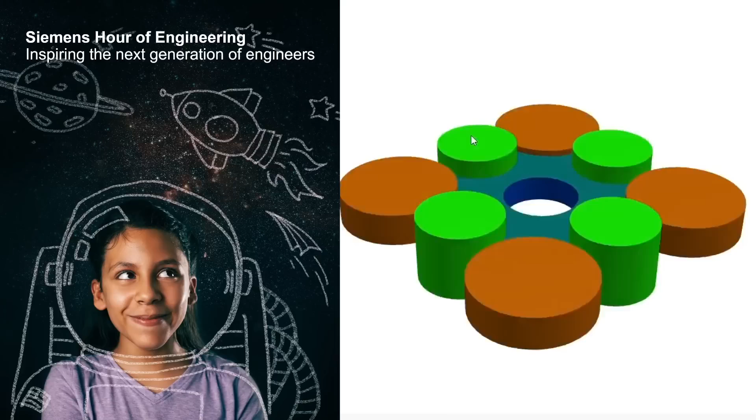We are also investing in the next generation of engineers through a new program called Hour of Engineering. This innovative program demystifies engineering and promotes it as a desirable career path by providing real-world engineering challenges connected to global goals. It helps students build engineering habits of mind like creativity, systems thinking, and collaboration. We're truly excited to engage with the engineers of tomorrow through this amazing program.

From education to startups to even larger enterprises, Siemens Digital Industries is all about helping companies like yours transform into a digital enterprise. And that digital transformation is enabled by Siemens Accelerator. Siemens Accelerator is an integrated portfolio of software and services, and it really blurs the boundaries between traditional standalone domains like electronics, mechanical, and software. It really ties all those together into one seamless whole.

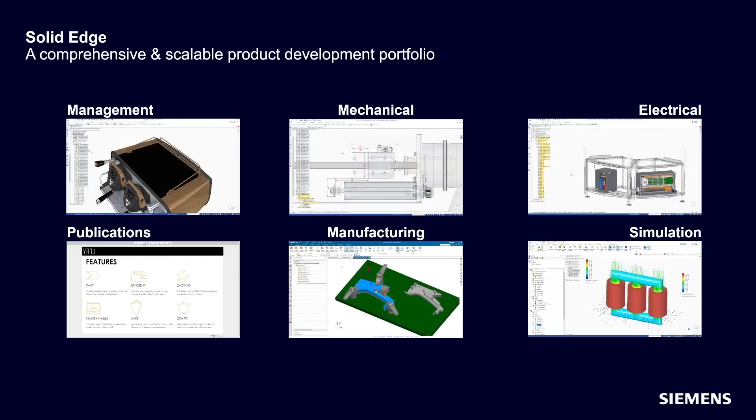And Siemens Accelerator really starts with Solid Edge. Solid Edge is a key part of the Siemens Accelerator portfolio and is focused on the requirements of small and mid-sized manufacturers. Solid Edge enables manufacturers to create a comprehensive digital twin of their products and includes solutions for mechanical design, electrical design, simulation, manufacturing, and publications. It also includes solutions for data management for all the technical data that's created and consumed when supporting the comprehensive digital twin. It facilitates collaboration both within manufacturing companies and with external resources, including suppliers and customers. Solid Edge is truly your on-ramp to digital transformation.

And we can help you accelerate that digital transformation with Solid Edge 2024. Unleash the power of intelligent product design. With this year's release of Solid Edge 2024, we continue to push the boundaries of product development. Solid Edge 2024 empowers users to design more intelligently across every aspect of product development. With a continued focus on the user experience and large assembly performance, Solid Edge 2024 introduces functionalities and enhancements to automate and speed design as well as collaboration. Here are just a few.

Nine times faster graphical performance, AI assembly relationships, great advancements in intelligent dimensioning, and so much more. Solid Edge 2024 is our best release yet.

Beta customers have already had the opportunity to experience Solid Edge 2024, and here's what one of them had to say. Each year, Solid Edge gets better and better. Everything is faster. You can definitely feel the excitement from folks like Karsten at Foca, who've had the chance to work with Solid Edge 2024.

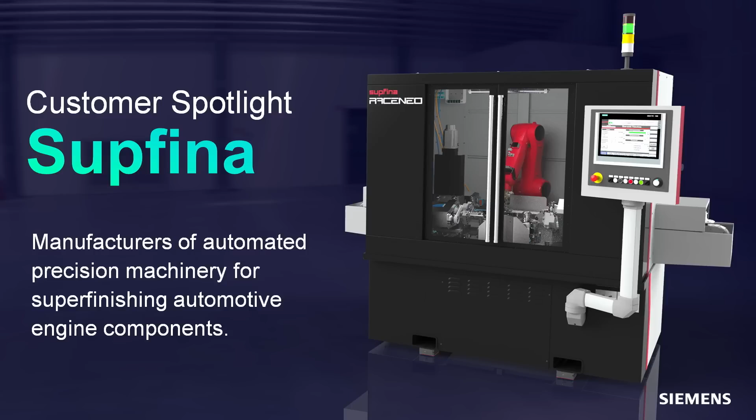Our featured customer in this year's release is Supfina from Germany. Supfina produces high-precision, fully automated grinding and honing machinery designed for super finishing automotive engine components such as crankshafts and camshafts. Let's start with a look at some overall productivity enhancements.

These are the things that will definitely make your daily life easier, and we're leveraging AI technologies in the design process to push that even further. Let's take a look with John.

Thanks, Dan. Let's dive right into this impressive Supfina machine. We'll start by focusing on the polishing tool and fixture for these high-performance motorsport roller bearings. By expanding the assembly features in the Pathfinder, we can see that a hole and cutouts were already added at the assembly level, and they need to be completed with a round and a chamfer.

New for Solid Edge 2024 is the ability to reorder the assembly features with a simple drag and drop process, just like we can in an ordered part model. It allows you to move parent and child features together, keeping your model organized.

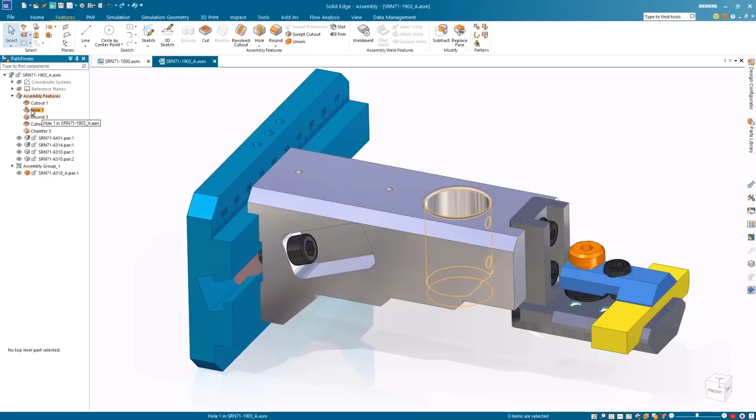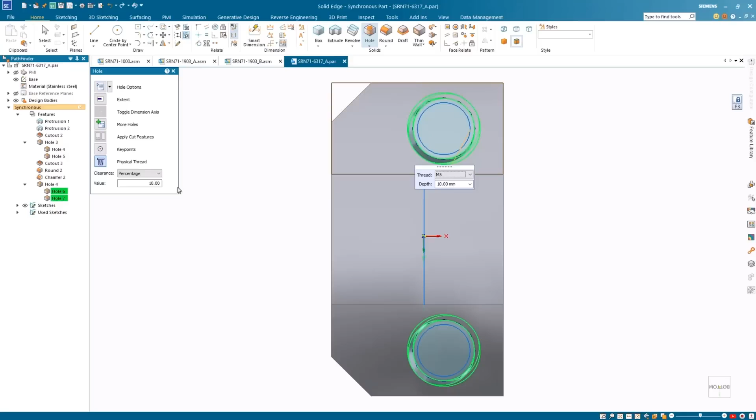The polishing tool has a 3D printed component that requires two holes to be added. To ensure appropriate fit and assembly for the 3D printed threads, we can define additional clearance values. These can be input as either a percentage or an absolute value. By selecting percentage, the internal diameter will increase by a percentage of the nominal diameter, which is seen in relation to the sketch. Switching to absolute allows the entry of a specific measurement.

To finish off the assembly, we'll add a polishing tool to the bottom of the cylinder. Here we'll add a mate and then a planar align. But then when trying to add the final axial align to correctly position it, we see it conflicts with some of the other relationships. Using the new Resolve Relationship Conflict capability, we can easily identify and suppress conflicting relations to resolve them swiftly.

This new tool helps streamline part placement and assembly relationship creation. Hovering over the listed conflicting relationships in the dialog highlights them graphically. One or more relationships can be suppressed until the requested relationship turns green, and the part is then placed correctly.

The improved Replace Part command now leverages artificial intelligence to predict solutions for replacing a single component occurrence within an assembly. The AI predictions support both planar and axial align relationships and present the solutions in a secondary dialog, allowing us to preview and select the most suitable option before executing the replacement, saving time and effort by not having to manually create relationships.

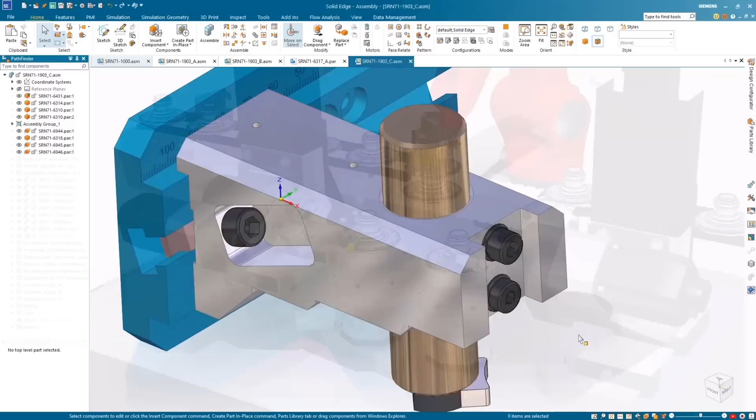Enhancements to variable table filters provide quick and easy access to filter options, resulting in an efficient experience that reduces both time and mouse clicks. In this example, variables are being used to control the position of the polishing tools and ensure they'll contact the bearing at the correct locations.

With numerous variables in the assembly, the results can be filtered by user-created, system-created, or both. Another great option for filtering is to only view variables relative to the components that are selected. This makes it easy in this case to find the swivel angle variable and make the desired change, and then change the Z axis value to change the vertical height of the polishing tool. Dan, back to you. Super.

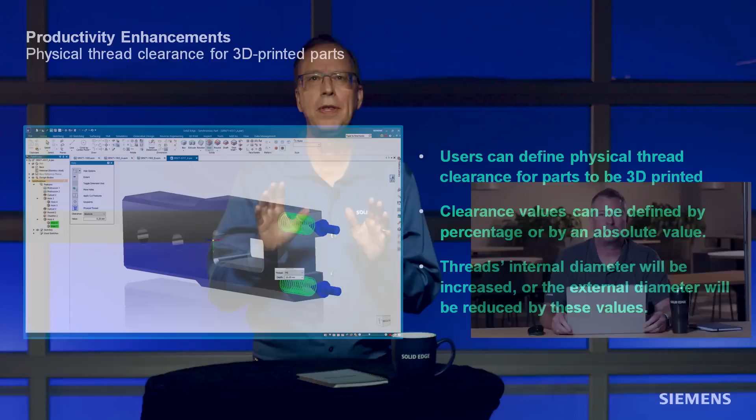Thanks, John. One of the things that you saw was physical thread clearance on 3D printed parts. And it turns out this is really important because unlike manufactured parts, where the standards define the clearance and high tolerances keep things working smoothly, in 3D printed parts you can get clashes that prevent smooth operation. Solid Edge automatically eliminates these, ensuring your printed parts work effectively.

You also saw the power of AI in action. With the improved Replace Part command, Solid Edge can now intelligently suggest assembly relationships and predict valid alternative solutions. The predicted solutions are graphically previewed in the design environment and can easily be selected in a pop-up dialog. And in addition to working with your custom designs, the AI-enhanced Replace Part functionality also works with parts from the standard parts catalog and 3DfindIT.

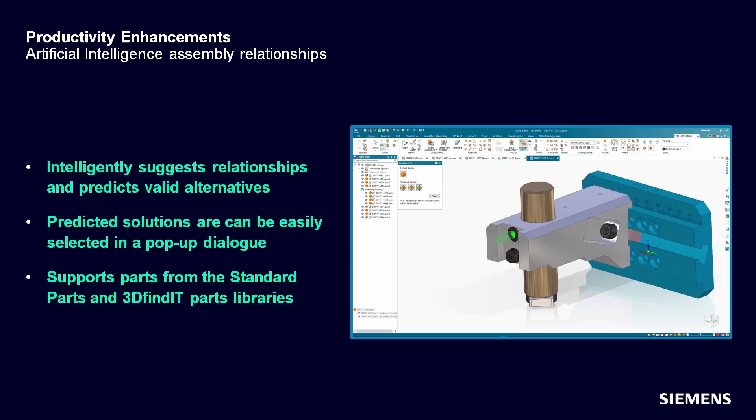Really powerful. Here's what Dave Iverson of Ariel had to say about Solid Edge 2024.

And I love the fact that he said, do more of the fun stuff. The reality is we are often doing tedious tasks. Let the computer do that. And that's what AI in Solid Edge 2024 can deliver.

Let's take a look at some more productivity enhancements in Solid Edge 2024. Over to you, John. Thanks, Dan. Let's look at even more productivity enhancements.

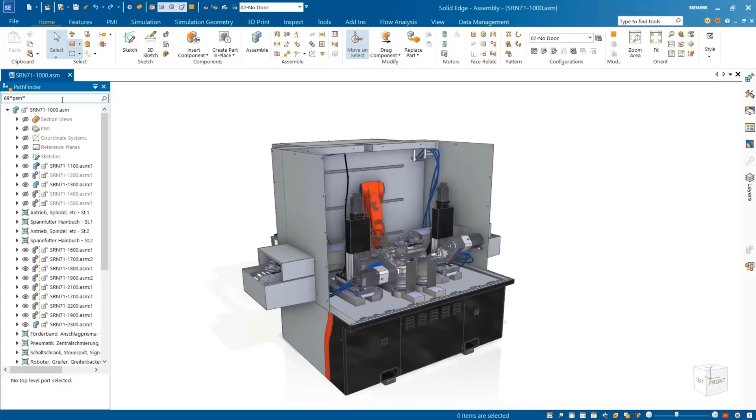Locating the right part has never been easier. Search wildcards are now supported in parts libraries, model view palettes, and the assembly pathfinder. These wildcards provide flexibility when searching and make it far easier to find what you're looking for, even if you only know part of the name. Search results display sub-assemblies and parts in various shades of green for easy identification.

With expanded family of parts options, we can now include flat patterns for sheet metal family of part members. This ensures each member contains all the information needed to create drawings and annotations. Once we define the new members, we can see further enhancements to family of parts, which include the ability to set individual material properties per member, as well as control over the suppression state of sketches and etch features. Not seen here, but we can also now handle simplified parts, coordinate systems, and reference planes too. Selecting a specific member shows the material change alongside the etch features defined for each specific member.

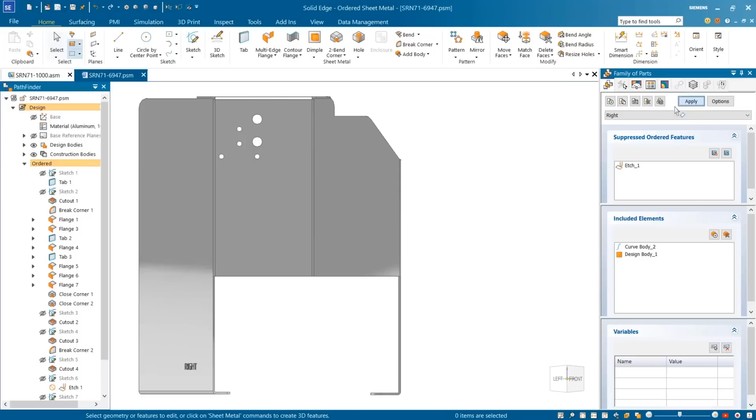Greater control of selecting objects has been added with new polygon and lasso selection options. This makes many common workflows much easier, like in this case with resizing holes. Using the lasso selection option, we'll select the desired holes and change the size with ease. These selection options are available right through the product in the part, sheet metal, assembly and draft environments.

Many designs require handed parts. These symmetrically opposite parts are identical mirrored copies of one another. A new streamlined workflow makes it easier and faster to create these left or right-handed parts that can remain associative to the original part if needed. With the selection of the mirror plane and a quick save, our new handed part is immediately available for use. And the best part of using the Save as Mirrored command is that all the features used for creating the original sheet metal part are carried over, minimizing errors when making downstream design changes.

The display of bend center lines is also now available in the flat pattern model environment. Here color coding defines the bend direction. Up bends are displayed in blue and down bends in green. The color and style of these can easily be modified to suit your company standards.

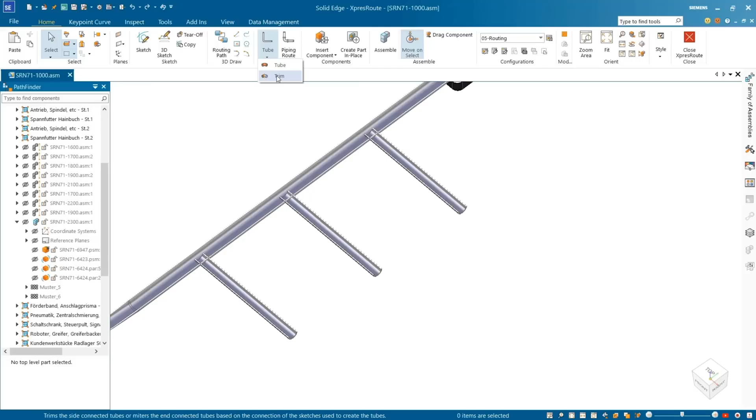In Solid Edge XpresRoute, multiple pipes and tubes can now be automatically trimmed with the help of the new Trim Tubes command. In this example, after turning on the clipping planes, we can see there's overlap between the main tube and the 3 cleaning tubes. We can trim these tubes so they join together seamlessly with just a few simple clicks. Simply select the primary and secondary tubes, then Solid Edge takes care of the rest, cutting holes and trimming the ends as needed.

Another new capability is the new Compact Recent Documents toolbar. It no longer takes up graphic space, and a single fluid click and drag quickly opens the file we need, saving time and energy.

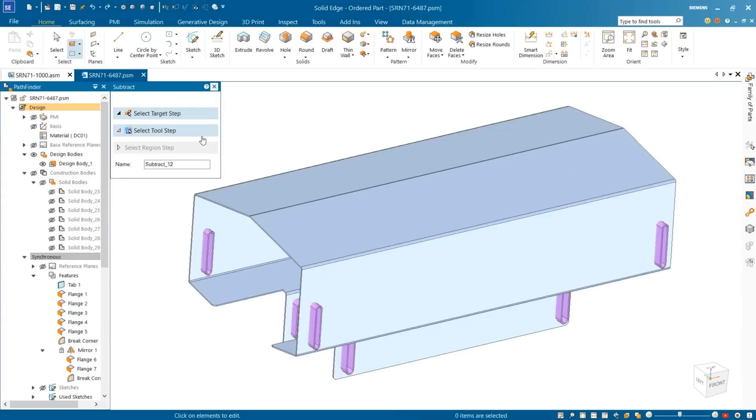The sheet metal cover requires some modification with the addition of several punched slots, which will locate it in the overall design. Construction bodies have been placed in the sheet metal part to represent the punches used to remove the material. Using the Subtract command, we can select the main target body and then quickly and easily choose the solid bodies as the tool set. Unwanted regions left behind as a result of this subtract operation, or disjoint regions, can be intelligently identified and automatically removed. Hiding the construction bodies, we can see all the internal disjoint regions within the sheet metal part have been removed, making the whole process quick and easy.

And back to you, Dan. Thanks, John. Now, obviously Solid Edge has had the ability to create left and right-handed parts for many years. But did you catch the breakthrough here? Optionally, instead of just producing a body, it will create a mirrored part with a fully editable feature tree. This frankly was quite a tough problem, and we had quite a few requests for it. So we're super happy to bring this to you in Solid Edge 2024.

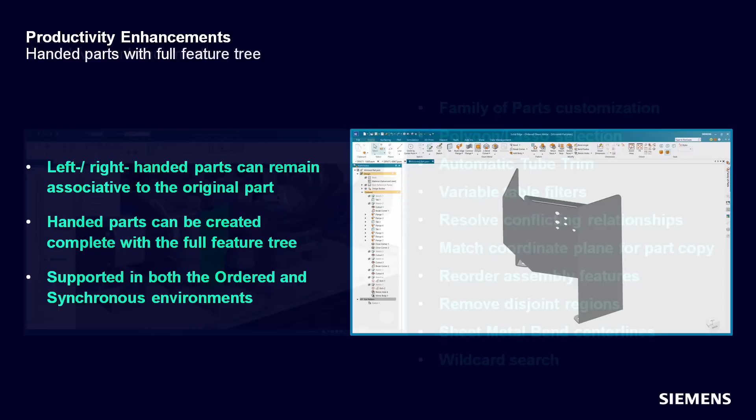You also saw a ton of other great enhancements, and just to highlight a few: now Family of Parts not only creates correctly sized bodies based on the parameters, but it also supports material, etches, coordinate systems, sketches, and more. This was a long-standing request that we're very excited to deliver.

Lasso selection can be handy in so many circumstances, and now it's super easy.

An often requested enhancement, the new Trim Tubes command automatically trims and cuts holes in intersecting tubes in the assembly environment. It not only supports tubes that butt into each other, but end-connected tubes can also be automatically mitered.

The variable table has been really improved, allowing users to access filters more quickly and easily, saving time and reducing mouse clicks.

When placing parts, conflicting relationships can now be automatically identified, giving the user the ability to resolve conflicts easily with a pop-up dialog that displays the issues. And so much more: matching coordinate systems, reordering assembly features, removing disjoint regions. The list just goes on and on.

Daniel Schultz of Kaiser had this to say: Siemens really listens to its customers. And it's true, we do. We really work closely with our customers and listen to how we can make things better, and this has really helped make Solid Edge the great product it is today.

Next up is large assembly performance. Solid Edge truly has best-in-class large assemblies, and now it's even better. Better model view performance allows you to view and manipulate even the largest assemblies without lags, stutters, or buffering.

New immersive view styles put your models in a real-world environment that automatically updates with model movement for more realism. View manipulation is automatically optimized, allowing users to run the most demanding assemblies at lightning speeds, without loss of detail or the need to adjust settings to hide features, parts, or assemblies.

Dynamic viewing is up to 3x faster on single parts and up to 9x faster for very large assemblies.

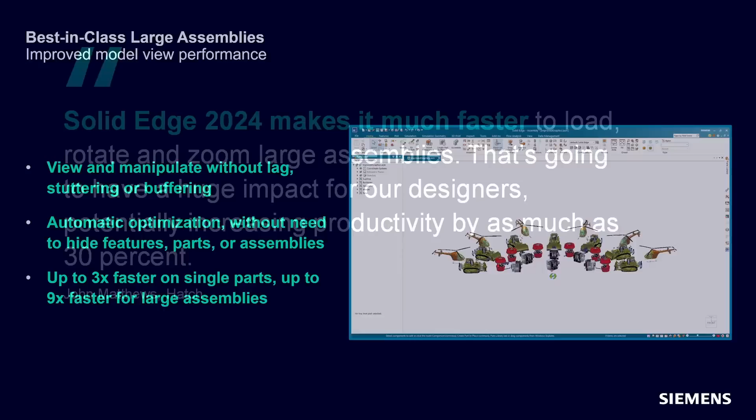Companies like Hatch are building some of the largest assemblies in the world. And as John notes, the Solid Edge 2024 advancements can have a huge impact on their designers, as much as 30% productivity impact.

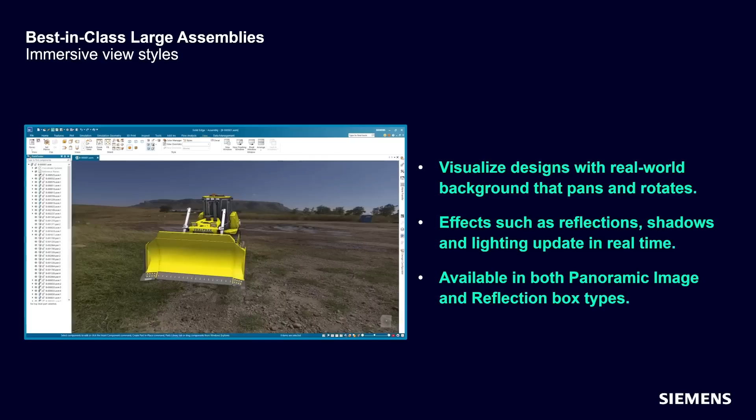In addition to the amazing speed improvements, you can also now visualize designs in a real-world background that pans and rotates with your model to create a more immersive user experience. As a design is manipulated, graphic effects like reflection, shadows, and lighting are also updated. This creates a more realistic, lifelike representation of the model in its environment. It's just like you're walking around the model in the real world.

Next up is Design Configurator, and I want you to pay special attention here because I know so many companies can benefit from this technology. Not only can you configure your own designs instantly, we are now delivering pre-configured conveyors, ladders, and other equipment that's commonly used in large machines and plants. What a time saver. Let's take a look.

Manufacturers are facing increasing pressure by their customers to offer greater choice and variety, leading to an increase in the number of product variants they need to define, author, and manage. New pre-configured models in Solid Edge Design Configurator allow quick and easy placement of intelligent datasets like ladders, conveyors, and enclosures. This helps to dramatically simplify workflows and improve productivity.

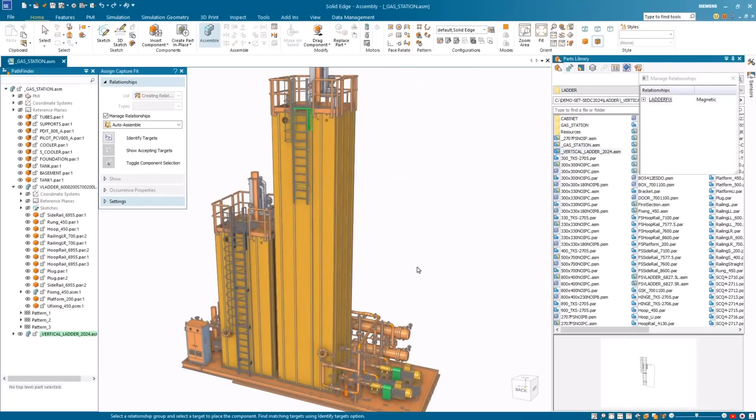In this example, a fully configured ladder assembly is being modified directly within the main assembly environment. There is no need to go back to the sub-assemblies and configure them individually. A secondary ladder is needed to complete our design. After placing the ladder, we can customize the length. Due to the intelligent model's rules, a second section and a safety hoop in the middle are also added.

To finish up the assembly, we need to add a final cabinet. The cabinet can be quickly customized inside the main assembly with the necessary dimensions and colors to fit our needs. With access to fully configured datasets such as ladders and cabinets, it has never been easier for customers to get jump-started with our Solid Edge Design Configurator.

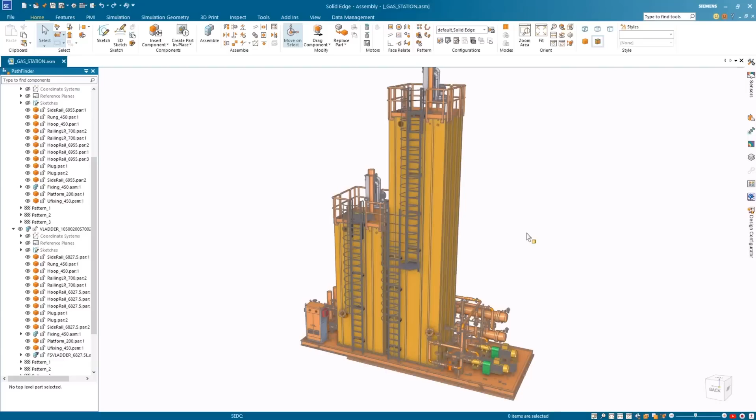With the new Call Subassembly command, alongside the Place Part Model and Loop Action commands, full subassemblies can be placed and configured right on the spot. Using these new workflow model actions, brand new assembly lines can be rapidly built. Here, base conveyors and other necessary components are being added to create the new assembly lines.

Solid Edge Design Configurator can automatically calculate the number of conveyors and other components needed to match user specifications. By inputting a given distance, the software automatically determines the number of conveyors needed. With the last machine added, the new assembly line is finalized and ready to be used.

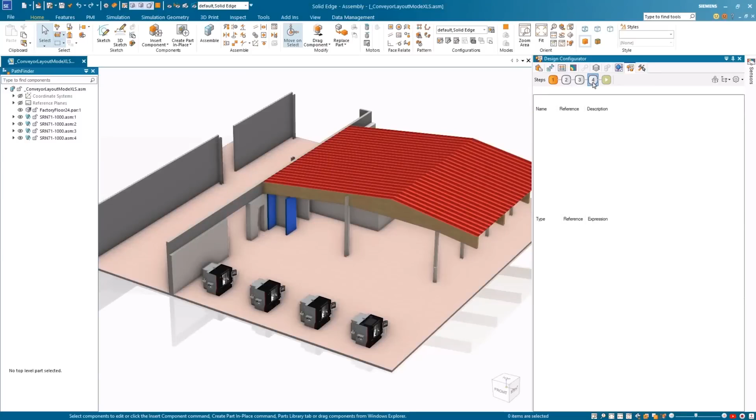The new ability to read from Excel files and external databases for input data and model actions allows you to automatically complete assembly lines in a fraction of the time. By reading the necessary conveyor placement data from an Excel file, the software instantly configures and completes the assembly line with just one click, as can be seen here.

Okay, back to you, Dan. Thanks, Sudha.

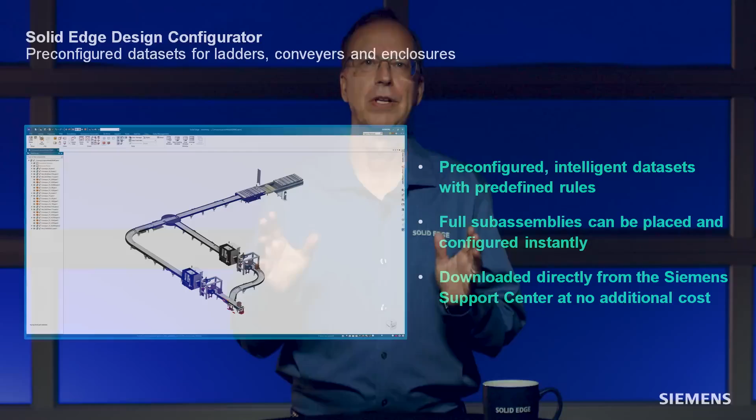Isn't that amazing how quickly those ladders were put in place and they're fully configured in seconds? You can really boost design speed using pre-configured models of ladders, conveyors, and enclosures.

One of the most requested customer features, pre-configured models downloaded from the Siemens Support Center, can now be directly used in the assembly at no cost to Solid Edge Design Configurator users.

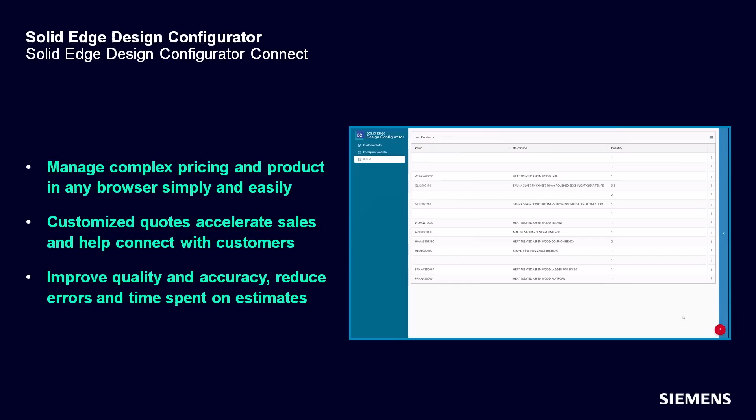In addition to all the great Solid Edge functionality you saw for configuring designs, you can also take advantage of Solid Edge Design Configurator Connect. This is a user-friendly web-based configurator that manages the most complex pricing and product configurations, allowing users to configure online in any browser simply and easily, and automatically generate sales documentation, including 3D models. Connect your engineering processes with sales and marketing, streamlining design workflows with the new Solid Edge Design Configurator Connect.

Michael Orr at Ariel quickly saw the value of Design Configurator and how it leverages your data and knowledge to really streamline assembly customization. He notes that it could be a real big time saver. If, like Michael, you thought that Design Configurator can save me time and money, I'm not surprised. It's an absolute productivity booster.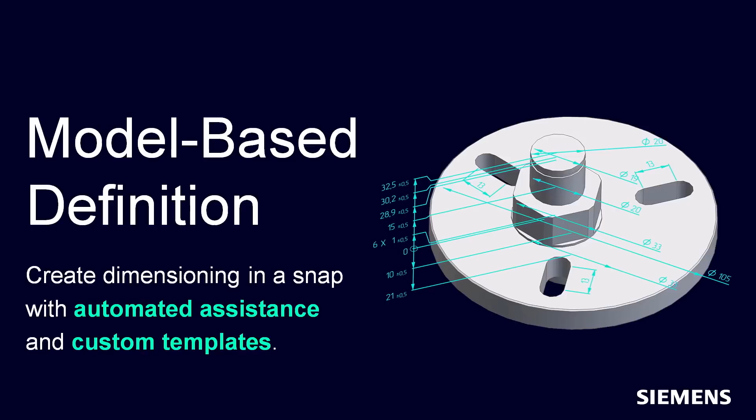Model-based definition, often called MBD, is all about moving the intelligence of the drawing upstream into the model. Why should the geometry be in the model, but critical information like tolerances is in the drawing? When we move all the intelligence to the model, we lower the 3D communication barrier and better convey design intent for downstream manufacturing processes. Here's how it works.

Sudha? Thank you, Dan. Let's look at how we can intelligently define and annotate 3D models while better conveying design intent for downstream manufacturing processes with Solid Edge Advanced PMI and model-based definition.

The improved auto dimension tool in Solid Edge Advanced PMI can now be used with 1 or 2 datums for more freedom when automatically dimensioning turned parts. Using the new recent documents preview, we will open another bracket that's been partially dimensioned.

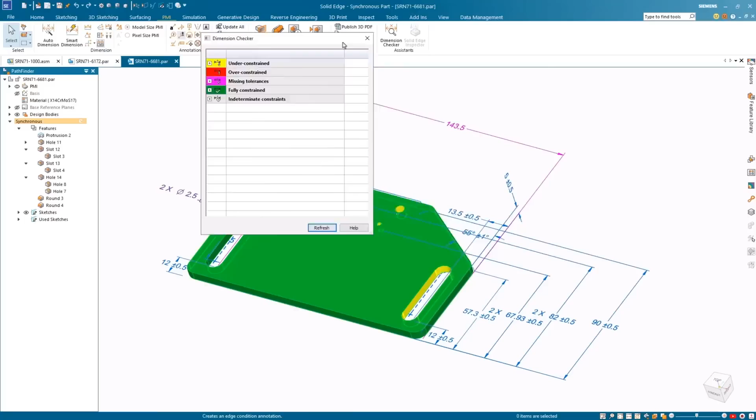With the dimension checker command, we'll quickly and easily identify the constraint status of features and parts. The model is automatically color-coded with feature IDs, informing you of the constraint status of features and if they lack tolerance information. In this example, the slot and holes are under constraint and a dimension is missing a tolerance value.

By adding the necessary tolerance, Dimension Checker will instantly update with the new status, and the Auto Dimension tool will automatically add the missing location dimensions for the holes, improving creation speed.

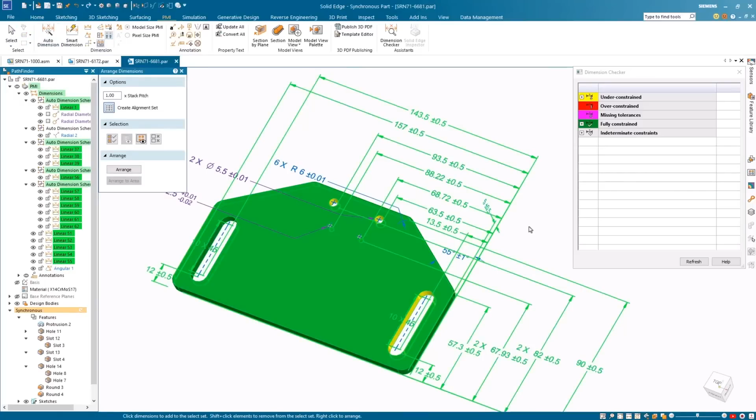The improved Auto Dimension tool also includes stack dimensions and callouts for slot and oval cutouts. Features chosen in the selected primary, secondary and tertiary planes can be auto-dimensioned instantly.

The Common Model View command allows users to create common model views automatically with existing PMI. With the required views selected, Solid Edge automates view creation.

Applying section views to a model view is easy with the enhanced vertical command bar that can be launched from the model view palette. This simplifies editing model views, as we can see here, whilst also adjusting the render mode.

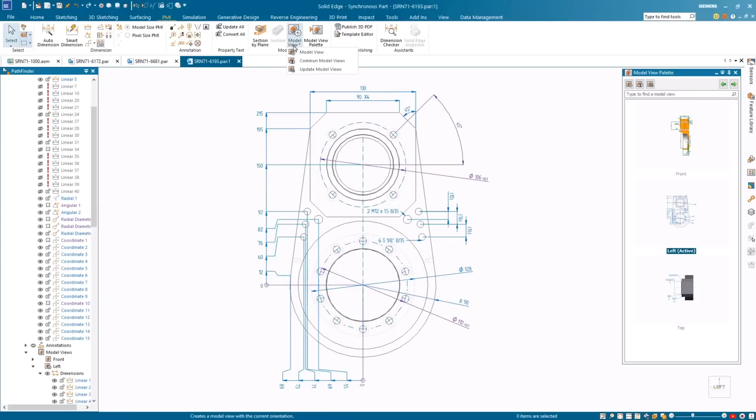To clean up the PMI dimensions, we will run the enhanced Arrange Dimensions command, which provides the ability to arrange coordinate dimensions alongside the linear dimensions. The Update Model Views automatically updates all model views when the model changes or PMI is added or removed.

Auxiliary plane indicators can be added, giving us more freedom to annotate the models based on ISO or DIN standards.

We can also convey design intent for downstream manufacturing process with 3D PDFs that can be published using templates. You can export PMI views with selected section views and render styles to 3D PDF to streamline the delivery of relevant design information. With new PMI face association, parent faces and section views are automatically highlighted when they are selected.

In the 3D PDF, assemblies can contain an interactive parts list. On selection, parts are highlighted in the list and graphics window. Associative properties such as author can also be included. STEP AP242 and JT files can also be generated and added as attachments within the 3D PDF.

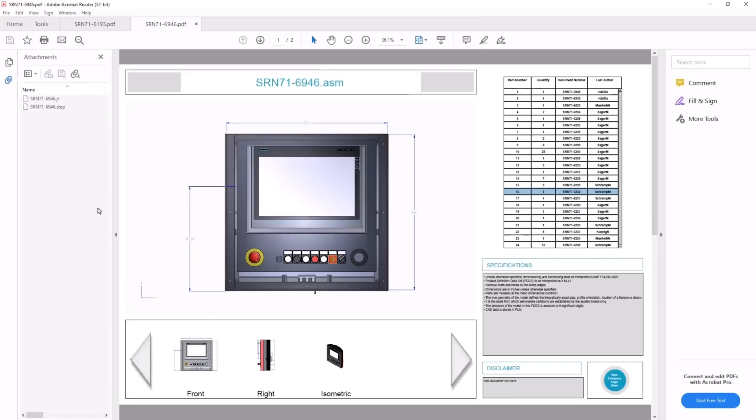Interoperability enhancements allow your Solid Edge files to look the same when opened across the Siemens Xcelerator portfolio, including NX. The improved PMI association and support for various PMI data provide increased connectivity for downstream applications. Visit the newly added Discovery Center in Solid Edge to get your free 30-day trial for Solid Edge Advanced PMI. Trials for other add-on products are also available.

Back to you, Dan. Wow, some really great stuff here, and I suggest that all companies look at this. We recognize that drawings aren't going away anytime soon, but it makes sense to move the intelligence upstream. Why have some of the information in the part and some in the drawing. Let's get to a single source of truth, the model. With 2024, there are some great enhancements here to get you on this path.

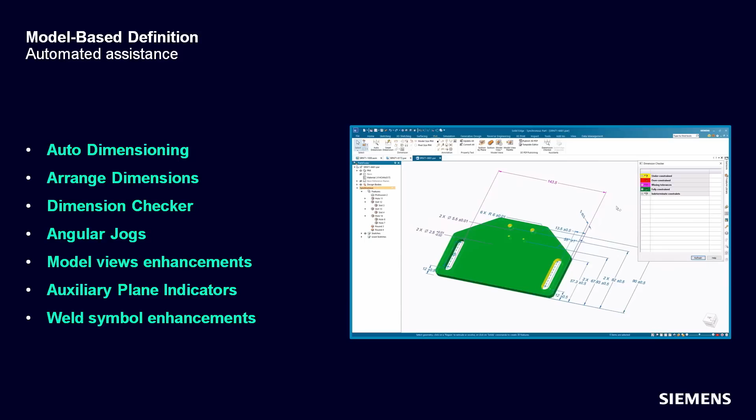Auto-dimensioning has had a serious upgrade, and the dimension checker really lets you understand if your dimension scheme is complete. And there are many other enhancements, so now's the time to get started with model-based definition. But don't worry, you can move at your own pace, either doing drawings or creating smart PDFs. It's really up to you.

I'm always amazed at how some seemingly small improvements can make such a big difference. Ken at Pello was really taken with the new, better layout that the automatic dimensioning provides, a huge help to his team. As I mentioned before, don't worry, drawings aren't going away, and Solid Edge will continue to be the best in the business.

But if you're further along in the journey and looking to publish 3D PDFs, then we have you covered. For example, 3D section views are now supported during Publish, and you can now graphically highlight items in the PDF and see what's associated. This is really helpful in downstream interpretation.

Companies like Kaiser are already on the paperless journey and are seeing definite benefits. Daniel sees some real savings coming as they transition to MBD and smart publishing techniques.

We've been talking a lot about core CAD functionality, and that is truly important. But more than ever, collaboration is key to improving engineering productivity. I don't think any of us could have anticipated how distributed our teams would become in recent years. But we definitely have some amazing tools to support this, and this comes in the form of Solid Edge SaaS, where collaboration is built right into your daily work. Let's take a look with John.

Thanks, Dan. Fully embedded in Solid Edge 2024, Teamcenter Share streamlines collaboration with all your team, partners, and customers. Users can now access Share's comprehensive suite of collaboration capabilities completely within the Solid Edge environment.

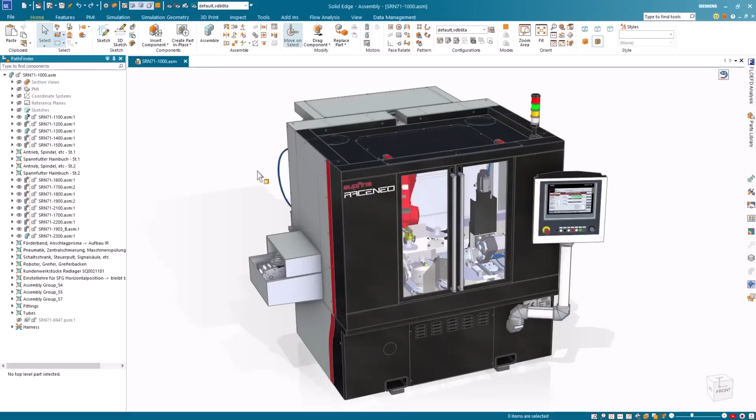Opening our Supfina super finishing machine from Teamcenter Share in Solid Edge, we get to work quickly as we look at adding threaded holes to this part we plan to 3D print. Here you'll notice the options to add additional clearance to the threads that we discussed in an earlier demo.

Using the built-in data management capabilities, we can check in files to allow other users to make modifications, or check out an assembly to ensure exclusive access while we make changes. Again, with Teamcenter Share fully embedded in Solid Edge, we never have to leave the design environment as we create a project with just a few clicks.

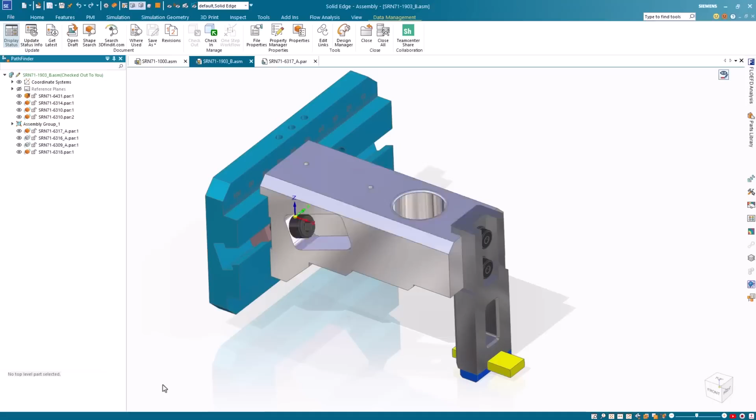With Pack and Go and the Siemens connector, we can share the subassembly directly to Teamcenter Share. Back in Teamcenter Share, within Solid Edge, we can open the project and add users to share it.

Users can be granted various access levels depending on the type of collaboration needed. We'll grant this user owner rights, giving them complete access to review, edit, delete, or reassign the project. Other access levels include review, review and download, and full access.

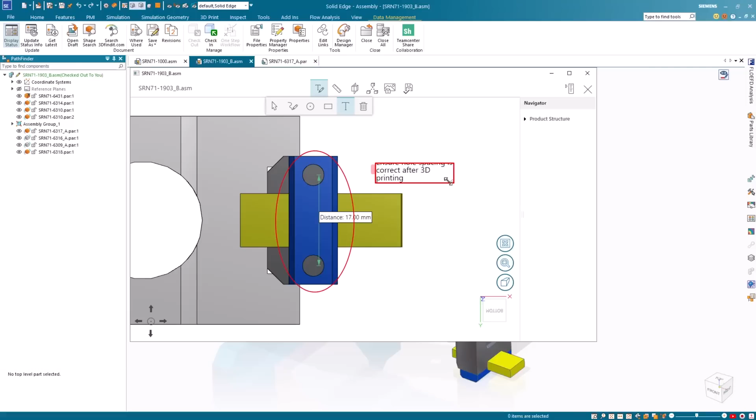Opening Viewer Markup gives us the ability to inspect the data quickly and collaborate with our team members. With the addition of threads, we want to make sure the spacing is still correct. A quick comment starts the conversation, and saving the markup makes it instantly available to our team.

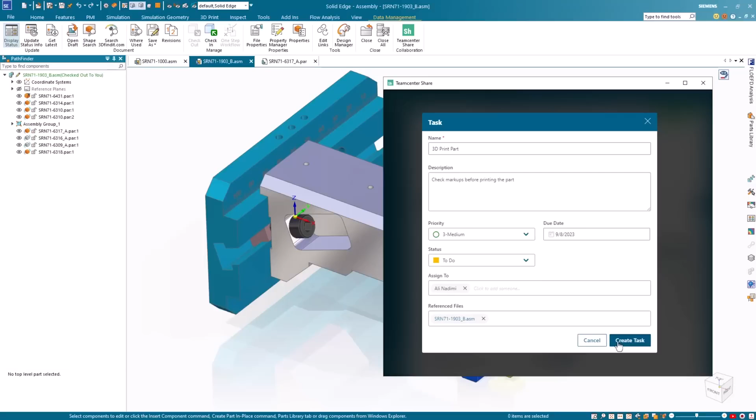Creating tasks has never been easier in Solid Edge thanks to Teamcenter Share. After naming the task, users have full control to add descriptions, set priority levels, due dates and statuses, and can assign the tasks to team members. Tasks can be viewed in a variety of ways, including on your Teamcenter Share dashboard, or as we see here, in a Kanban board. Dan, back to you.

Thanks, John. Great stuff. So you saw how you can access Teamcenter Share, a comprehensive suite of collaboration capabilities fully in the Solid Edge environment.

The same browser-based experience of Teamcenter Share is still available anytime, any place, and on any device as before. But now Share is also available without leaving Solid Edge. This saves users time by eliminating the need to switch between different application windows. Plus, you can synchronize your Solid Edge design data on your desktop and in the cloud.

Automatically installed with Solid Edge, Siemens Connector offers enhanced integration between Solid Edge and Teamcenter Share, enabling you to work seamlessly with your cloud and desktop data.

In addition to the great enhancement of having Teamcenter Share embedded in the Solid Edge environment, we continue to improve Teamcenter Share as it supports products across the Siemens Accelerator portfolio. You can now onboard multiple users faster and easier, share projects, assign tasks, and send messages to users not currently associated with the project. Attach notes to a project, files, tasks, and send messages instantly.

To support ever-growing file sizes, especially those for simulation files and results, users can now upload files of up to 500 gigabytes each. Additional cloud storage packages up to 100 terabytes are now available.

In addition to Sunny Bay, many other customers are already doing great things with Solid Edge SaaS and built-in Teamcenter Share, like Craig Hall at Hall Designs. Hall Designs is using the new cloud collaboration capability of Solid Edge SaaS to collaborate more effectively and reduce their design and development time, and dramatically streamline their communication with clients. Look at those numbers: 25% improvement in revisions and 80% time savings in sharing of designs.

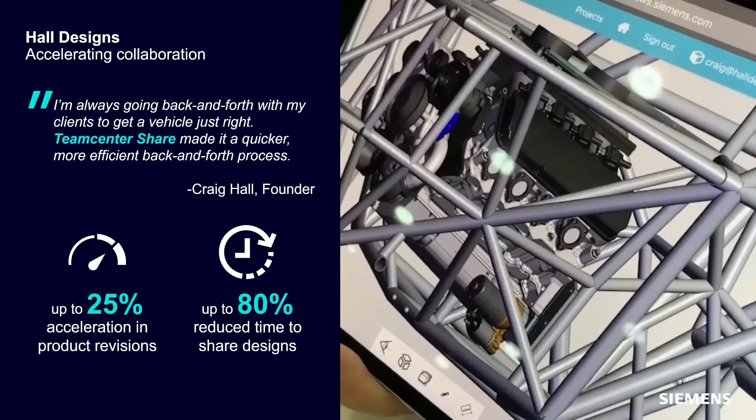Now that's productivity. Solid Edge CAM Pro has also received a great update. Get faster and more accurate programming with Solid Edge CAM Pro. Let's take a look with Sudha.

Thank you, Dan. Solid Edge CAM Pro continues to improve productivity by leveraging artificial intelligence to suggest the most frequently used machining options in a new prediction tab. No more hunting for options. The prediction tab is customized for each user.

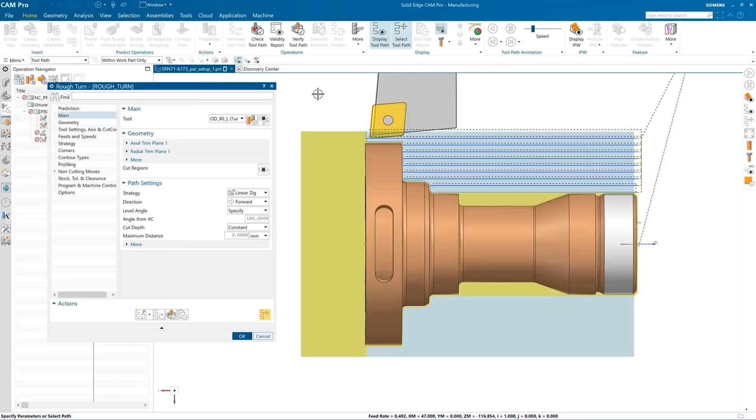Also new is auto-generate for 2-axis and 2.5-axis operations. For simple turning operations or for certain 2.5-axis milling, we no longer need to generate the operation. As soon as enough parameters are available to calculate a toolpath, Solid Edge CAM Pro takes care of it. This makes NC programming faster by allowing users to review results quicker. Similarly, any changes that require recomputation are also automatically performed.

There is also now support for prime turning. Using either Sandvik Prime Turn A or B turning inserts, we can quickly, efficiently and safely remove the material from this undercut. Notice how smooth the entrance and exits are, which produces less stress during the cutting and helps the inserts last longer.

Solid Edge CAM Pro introduces 3D adaptive roughing, which provides the most efficient rough machining possible. 3D adaptive roughing has reliable dynamic holder collision checking when the tool moves within a region or across multiple regions. Tool path generation is faster and bottom-up cutting has been enhanced. We also added a new option to top off flat faces for faster throughput.

Moving forward with our success with PostHub, we are now introducing the Cloud Connect tool library. As the name implies, cutting tools are now stored in a cloud database for easy access. Tools and holding devices can be easily searched, downloaded and modified.

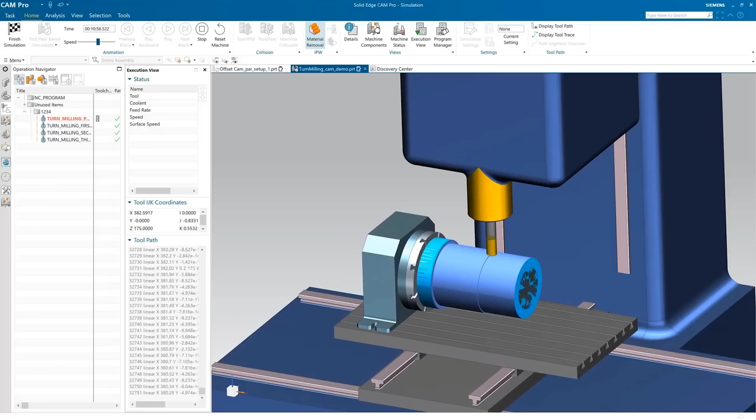Turn milling is a new operation subtype designed to easily machine symmetric and eccentric cylindrical surfaces with high surface quality, precision and high cutting volume. It is used to pre-cut cylindrical parts before finished machining with the other rotary milling operation subtypes.

Solid Edge CAM Pro provides cutting-edge updates that accelerate machining while bringing the power of artificial intelligence and the cloud to speed your manufacturing processes. Back to you, Dan. Thanks.

Some real time savers in there. The 3D adaptive roughing means faster programming and more efficient machining, while the AI-assisted operation editing predicts the most probable parameters, accelerating programming processes and ensuring accurate repeatability. The new prediction mode will learn from the user's best programming practices to dynamically change and predict user behavior.

Cloud Connect tool library is a new application that utilizes the cloud and provides a user-friendly, intuitive experience when previewing tools and dimensions. And PrimeTurning is now supported.

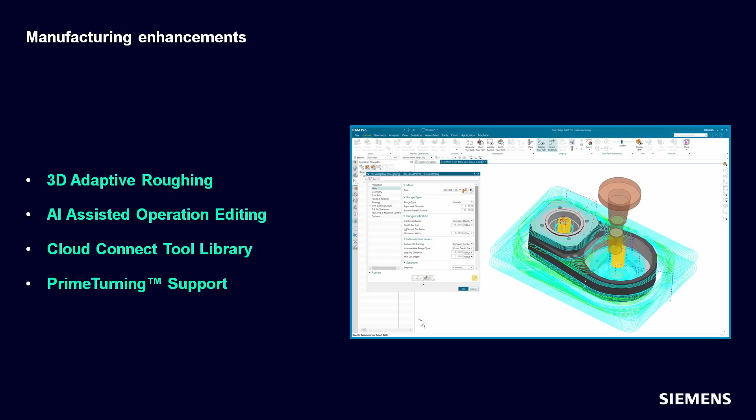PrimeTurning is a new methodology which enables turning in all directions, resulting in a 50% productivity increase for turning operations. Enhancements in Solid Edge simulation and Simcenter FLOEFD for Solid Edge increase simulation performance and speed with improvements to meshing, structural analysis, and interoperability.

Here's Sudha. Okay, thank you, Dan. New for Solid Edge 2024 is the ability to import solid temperature results from Simcenter FLOEFD for Solid Edge into a static simulation study.

Here we see the results of a FLOEFD simulation in a heat exchanger and the temperature distribution of the fluid flow on the parts.

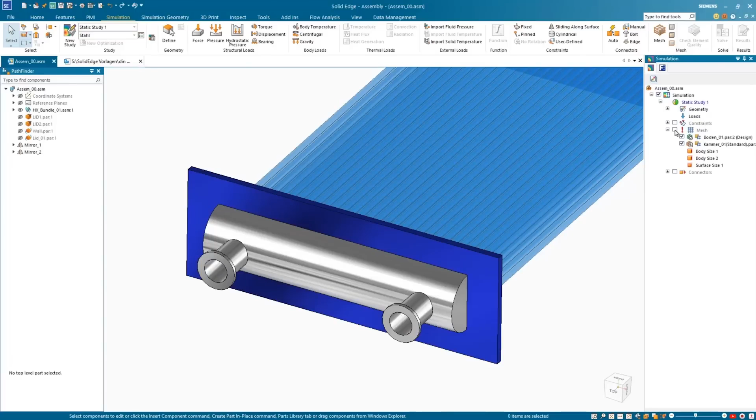Switching to Solid Edge simulation, we already have a study created with all constraints but without any loads. Using the new import solid temperature function, we can set the load for our simulation study and start the solve. The Solid Edge simulation study processes the results from FLOEFD and solves the calculation.

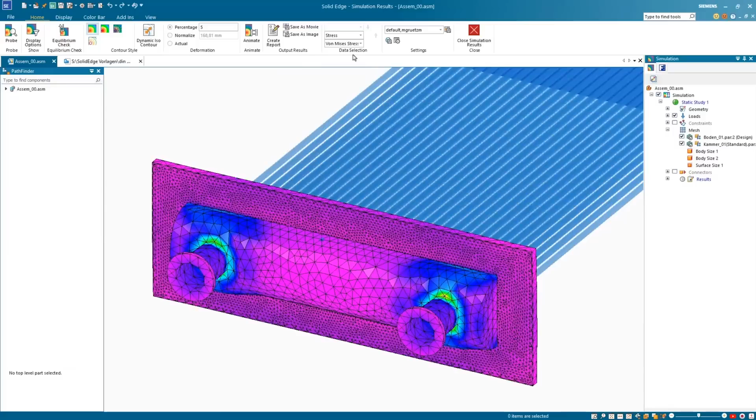Viewing the results, we can see there are high stresses in the parts as a result of the temperature. This interoperability is useful for finding the thermal stresses and deformation in solids, helping understand part behavior and avoiding failures long before real products are manufactured.

Solid Edge 2024 also introduces the ability to apply a force to any user-defined point, allowing for greater control of simulation studies. In this example, we have already created a study to show what happens when the component is put under an internal pressure. With some further analysis, we can define some additional loads.

An easy way to do this is simply to add a force to a point. We have already defined a sketch, but we will add an additional sketch point that we wish to use in our study. Then select this point to apply the force to. We will set the force direction, solve the study, and then review the results.

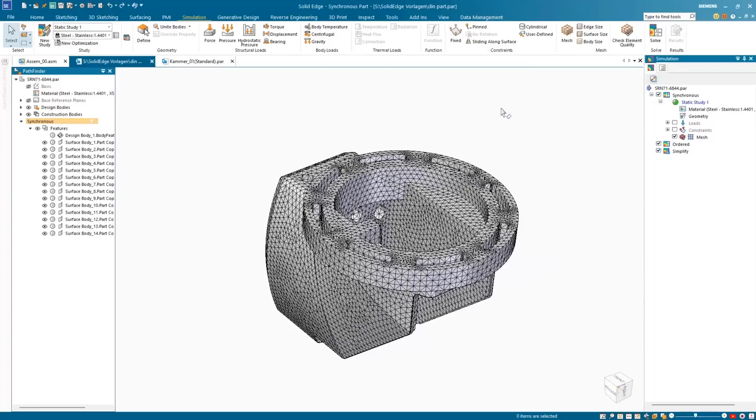Finally, we want to look at another function that is very useful for checking more complex models. Our model already has a mesh generated and we wish to analyze the quality of it with the check element quality function. It hasn't always been easy to identify the problematic areas, but now the display of mesh quality checks has been improved to make it easier to identify poor quality areas. This means users can now immediately take the necessary actions to address any problem.

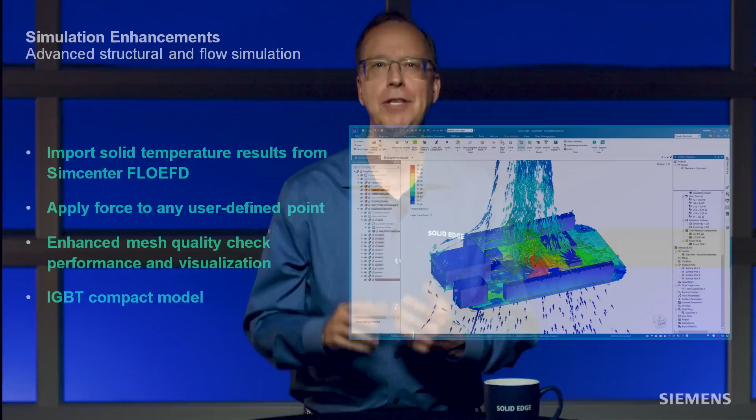Looks great. As you saw, Solid Edge simulation users can now import solid temperature results from a Simcenter FLOEFD analysis into a Solid Edge study. The new option to apply force to any user-defined point, rather than just a mesh vertex, allows for greater control of simulation studies. And the display of mesh quality checks has been improved to make it easier to identify poor quality areas. Finally, the insulated gate bipolar transistor, or IGBT compact model, is now composed of an electrical element and two resistor component compact models, providing a very efficient representation of the IGBT element.

Next, I want to talk about value-based licensing, which is a truly important innovation, allowing you to explore and use a variety of Solid Edge portfolio products at a very low cost.

Rather than traditional purchasing of individual products, value-based licensing provides cost-effective bundles of license tokens that can be used to access Solid Edge add-on products on demand. You get instant access to advanced functionality that can be shared across your product development teams on an as-needed basis, and at a much lower cost than buying individual products. Let's take a look at how it works.

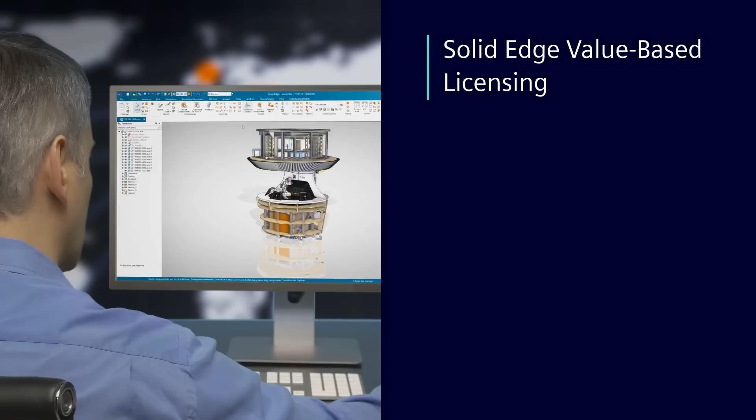New for Solid Edge, value-based licensing. A flexible licensing option to help you with the challenges of a rapidly changing development environment. This approach allows you to discover new Solid Edge add-on products while increasing flexibility for you and your team. Let's have a look at how value-based licensing works, starting with the base application, Solid Edge Classic or Premium.

Value-based licenses offer a fully flexible environment in which users can explore different functionalities. Companies acquire a set of tokens, which allow the running of a wide array of applications. Tokens are available in yearly subscription packs that make the add-on products available as a single shareable bundle. Tokens can be checked in and out to allow for maximum flexibility.

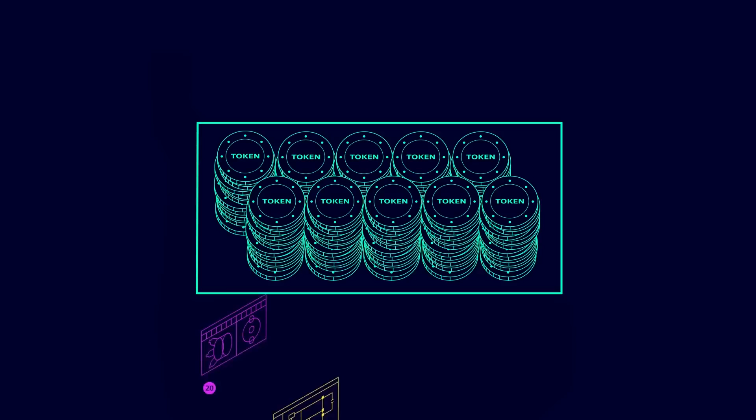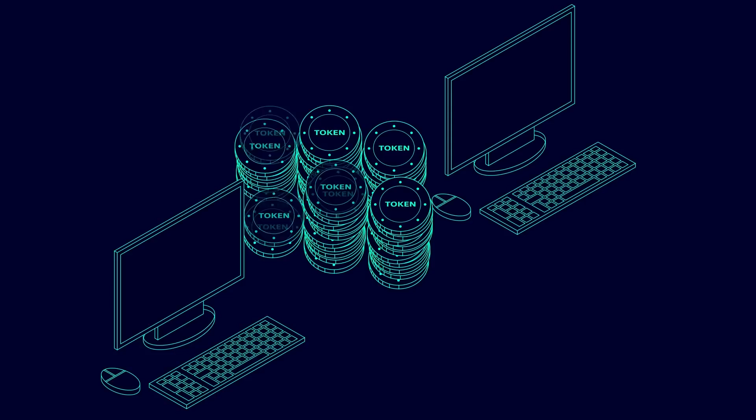Just imagine, a worker is confronted with a maximum token limit. By having a joint token pool, the limitation is automatically lifted as he or she is able to claim unused tokens from a colleague. In this context, it's also perfectly possible for users to use the same application simultaneously, as long as the token maximum isn't reached.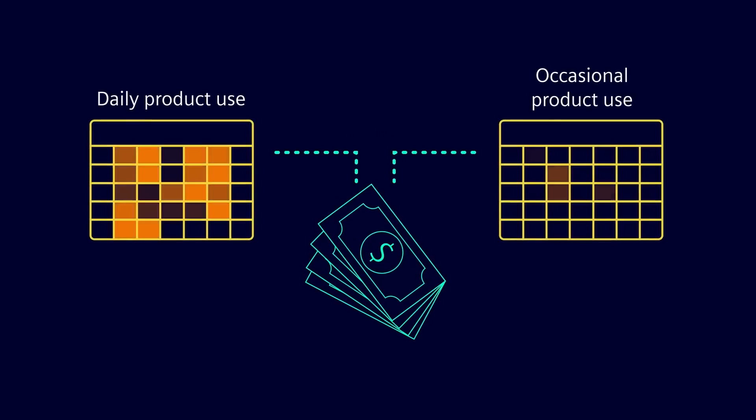Value-based licensing gives you the ability to manage costs, discover new applications, and easily scale your business. In many cases, the total investment is less than individual licenses, yet the flexibility dramatically increases regardless of whether the modules are used daily or occasionally.

Value-based licensing, new for Solid Edge, offers a truly flexible, cost-effective, simple-to-scale approach that reduces risk over time and encourages users to maximally explore new possibilities.

I think you're really going to like value-based licensing. Look at the list of products here. These are all valuable products, but are you going to use each one every day? What if you could just mix and match and decide what you want to use at any time without having to buy all the individual products?

Well, now you can. Generative Design Pro, Point Cloud Visualization, Solid Edge Simulation Advanced, and all the others you see here are all available through value-based licensing. I think you can see how this can add a whole new dimension of flexibility and access to your product usage.

Tokens are available in yearly subscription packs of 25 and 50 that make the add-on products available as a single shareable bundle. Tokens can be checked in and out to allow for maximum flexibility. Users can mix and match the add-on products as needed within their permitted token allowance. It's really the ultimate in flexibility and will give you access to technologies you never thought possible at an unbeatable price point.

In addition to all the wonderful enhancements you've seen in Solid Edge itself, the Siemens Xcelerator portfolio is the most powerful in industry. And with Solid Edge, you can connect to the many other powerful applications that are part of Siemens Xcelerator, like NX and Teamcenter. Let's take a look at how Solid Edge and Teamcenter work together closely in a product configuration scenario. John? Thanks, Dan.

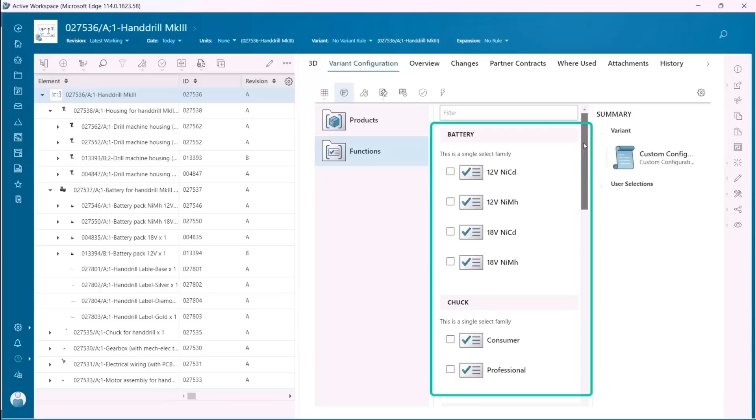Engineering complexity explodes as products become more complex. Product cycle times become shorter, markets and manufacturing go global, and customers demand more choices and customization. Companies need a solution that enables them to manage this complexity, from product inception through to manufacturing, in a simple way that enables reuse and commonality, and eliminates engineering cycles on products that will never be offered on the market. Teamcenter and Solid Edge are industry-leading solutions that address these challenges with tight integration.

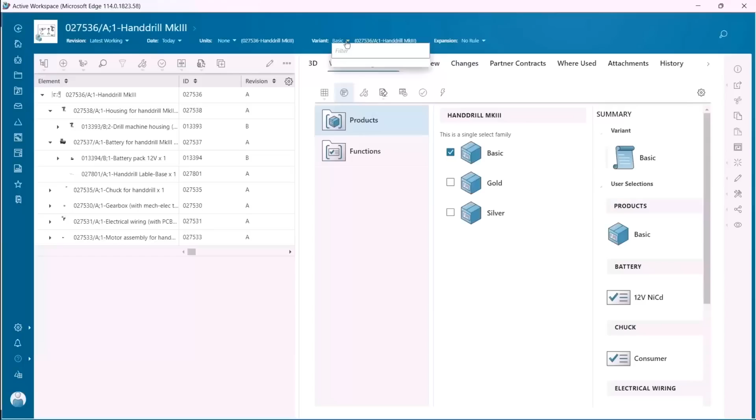This handdrill assembly has been configured with product family members using Teamcenter Product Configurator. We're seeing the full 150% bill of material, and if needed, we can apply a variant which updates the bill of material accordingly. In this case, the handdrill has been configured with 3 variants.

Once opened in Solid Edge, we get the options to load a 150% unconfigured bill of material, or we can select a product variant which loads a 100% bill of material. We'll select the standard basic variant from the product family and load it in Solid Edge. All the components associated with this variant are loaded. We can verify this by expanding the subassemblies to visualize the components associated to this standard variant.

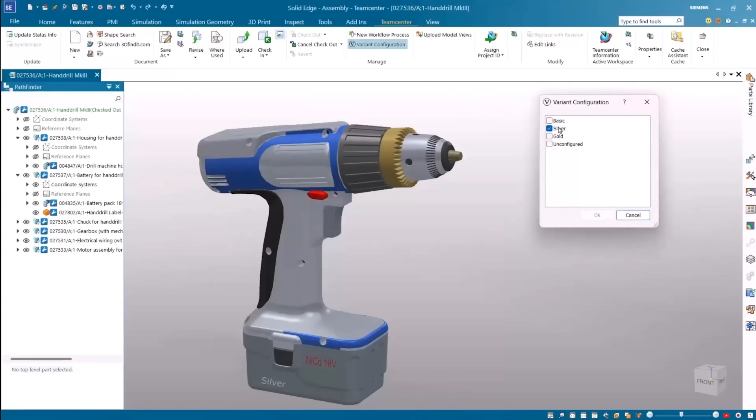The list of product variants defined in Teamcenter can be viewed, and the active variant currently loaded in session is highlighted. All information is synchronized between Teamcenter and Solid Edge. We have full control whether we want to load a different variant, load more than one variant to provide us a 120% bill of material, or load all variants to create the 150% bill of material.

If needed, we can edit any variant as we have full read-write access. We'll load the gold variant, then edit the battery subassembly to make some changes. Here we'll reposition the label component in the correct location using the appropriate assembly constraints. Dan, back to you. Thanks, John.

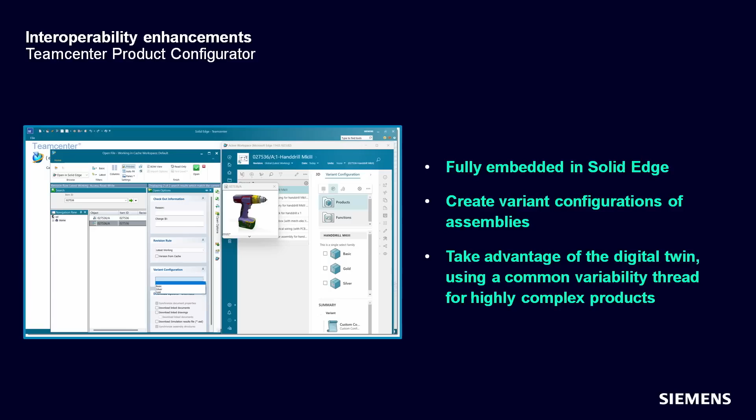It's great to see that tight integration. Teamcenter Product Configurator, which enables users to create variant configurations of assemblies, is now fully embedded in the Solid Edge environment. This allows you to take full advantage of the digital twin by using common variability thread for highly complex products. Powerful impact analysis technology is also available across the product suite.

We've also significantly upgraded our interoperability with NX. Changes to PMI in Solid Edge will now automatically update in NX, and the PMI from the Solid Edge files look the same when it's opened in NX. Support for stacked annotations, center marks, centerline, bolt hole circles, and more is now available. Additionally, assemblies created in Solid Edge that contain internal components now open correctly in NX.

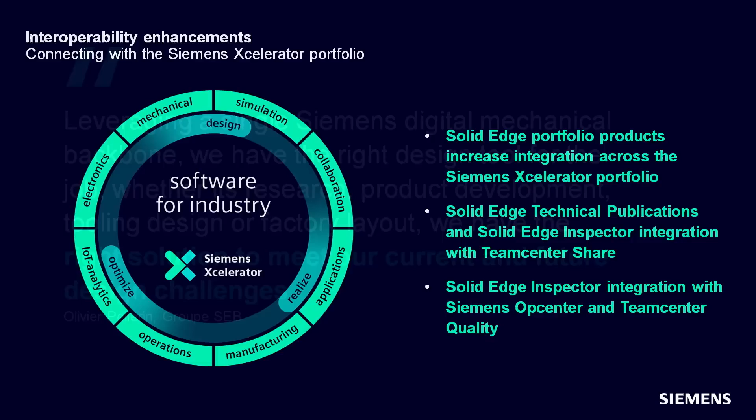We've also expanded interoperability and collaboration between other parts of the Siemens Xcelerator portfolio. For example, technical publications and Solid Edge Inspector are both integrated into Teamcenter Share, and Solid Edge Inspector now fully integrates with Opcenter and Teamcenter Quality. At Groupe SEB, longtime Solid Edge user Olivier believes that these interoperability functionalities and others across the Siemens Xcelerator portfolio give him and his team the right solution to meet their current and future design challenges. Not only does Solid Edge work great with other parts of the Siemens Xcelerator portfolio, it also works great with data from external sources.

So whether you're switching from another CAD system, reusing legacy design data, or working with suppliers, Solid Edge makes working with third-party files as easy as native data. If you're working with customers or suppliers that use a different CAD system, CAD Direct is going to save you a lot of time. Rather than translating the file and having an intermediate file to keep track of and update,

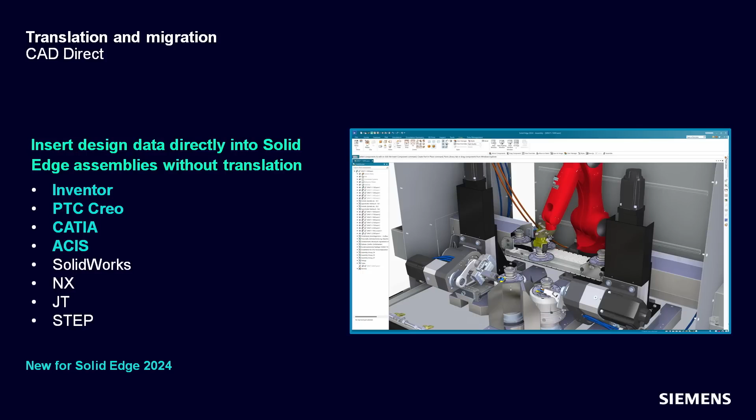with CAD Direct you're using the design file directly. So you can, for example, directly assemble a SolidWorks file into a Solid Edge assembly. And because this is so powerful, we've expanded the lineup of systems that CAD Direct supports, now including Inventor, Creo,

CATIA, and ACIS. If you haven't incorporated CAD Direct into your workflow, now is the time. And for those of you migrating from other systems to Solid Edge, we've continued to make our best-in-class tools even better. Those of you coming from SolidWorks and Inventor will see even more complete and easier to use tools than in the past. We've also enhanced many of our other data sharing pathways, such as STL, Creo, and even 2D.

Solid Edge 2024 is our best release yet. We're excited to bring you all the new functionalities and enhancements because we know they'll help streamline your productivity. But don't just take my word for it.

Throughout this presentation, we featured Supfina's Race Neo Super Finishing Machine. Let's see what Markus Mueller at Supfina thinks about Solid Edge 2024.

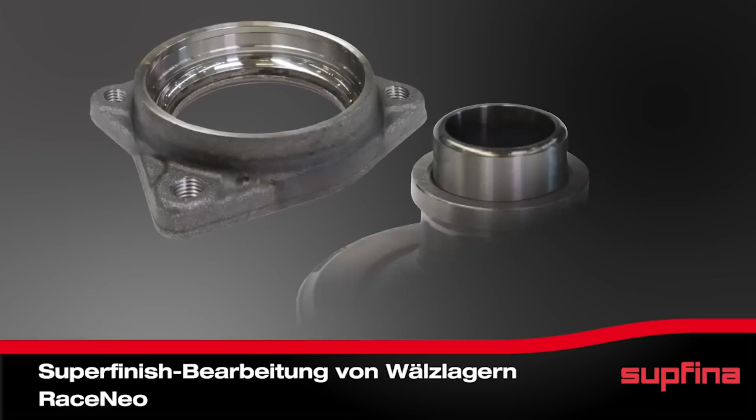We at Supfina are specialists for super finishing and any high-precision surface. We design solutions for our worldwide customers, especially for the automotive and bearing industry. With the help of Solid Edge, we can meet our customer-demanded requirements. We have been using Solid Edge now for 23 years, and it's a critical component of our success.

In my opinion, the standout features of the new release are large assembly performance, cloud collaboration via Teamcenter Share, and the usage of AI-powered design tools.

Supfina assemblies are large and complex because we use them as a digital mockup. With the new release, we are able to visualize, pan, zoom, and rotate our large assemblies 5 to 9 times faster. Also, we plan to use Teamcenter Share to communicate more easily with our suppliers and external design offices.

This certainly works with the great redlining and Kanban task management. AI enhancements, especially in the area of synchronous technology, make Solid Edge easier to use. For us, that means saving time for ideas and reducing unproductive work.

Thanks, Markus. As we finish up here, I want to remind you that there are now 2 ways to buy Solid Edge. You can, of course, continue to buy Solid Edge in its traditional, perpetual form. But Solid Edge SaaS is now available as well, with its expanded cloud-based collaborative set of tools and value-based licensing. If you haven't yet looked seriously at Solid Edge SaaS, now is the time.